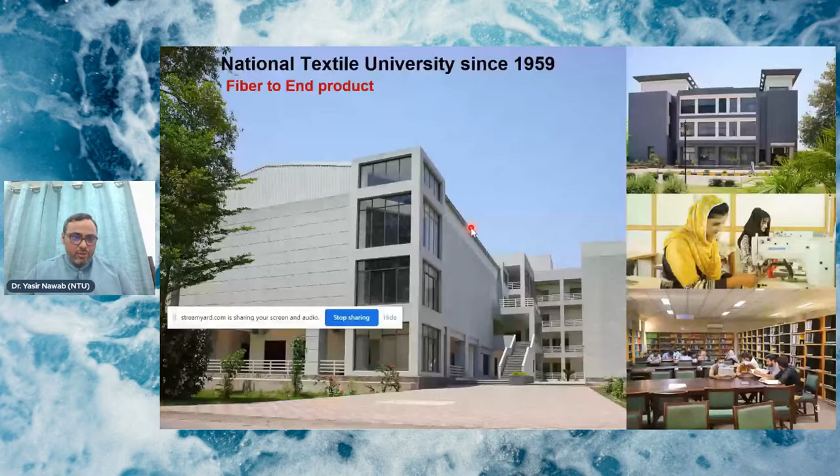National Textile University is in Faisalabad, in eastern Pakistan. We have been there since 1959, and we do research and provide bachelor's, master's, and PhD education, focusing on the complete value chain of textiles. I'm leading the National Center for Composite Materials, as well as serving as Dean of the School of Engineering and Technology.

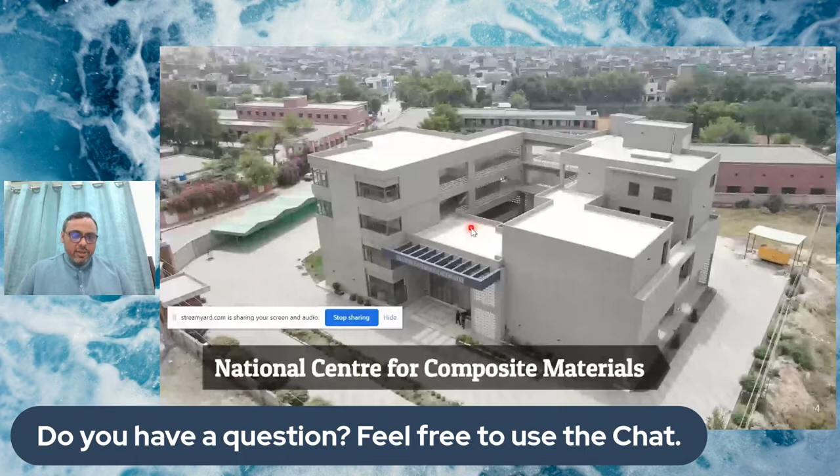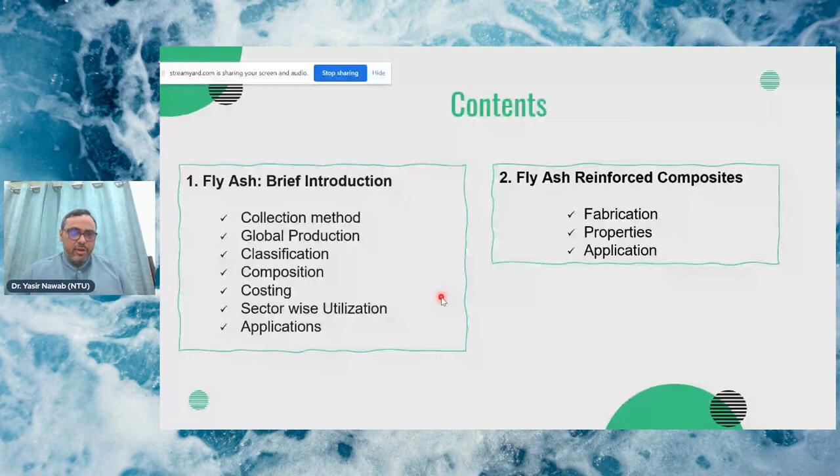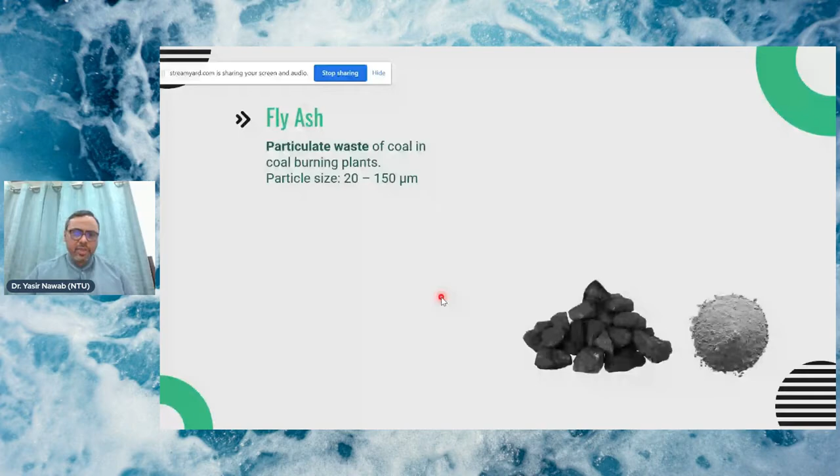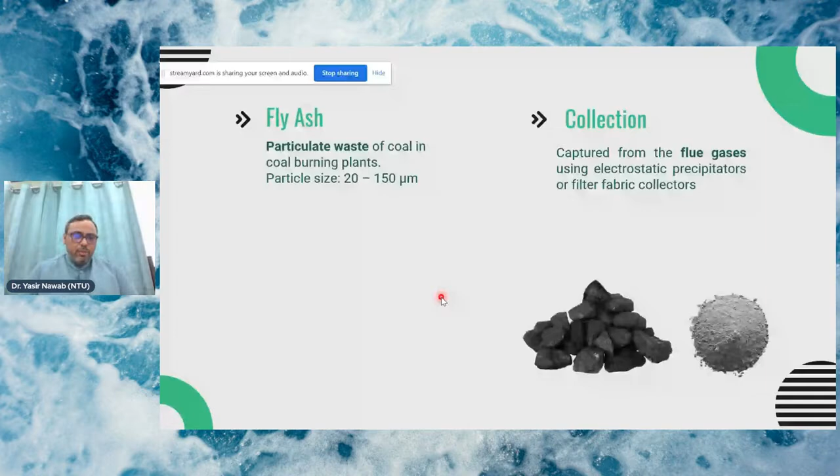Fly ash is a particulate waste from coal in coal burning plants. The particle size in fly ash is about 20 to 150 micrometers. Generally, we capture fly ash from the flue gases using electrostatic precipitators or filter fabric collectors. The composition depends upon the source and composition of coal. The major contents include silicon dioxide, aluminum oxide, calcium oxide, etc.

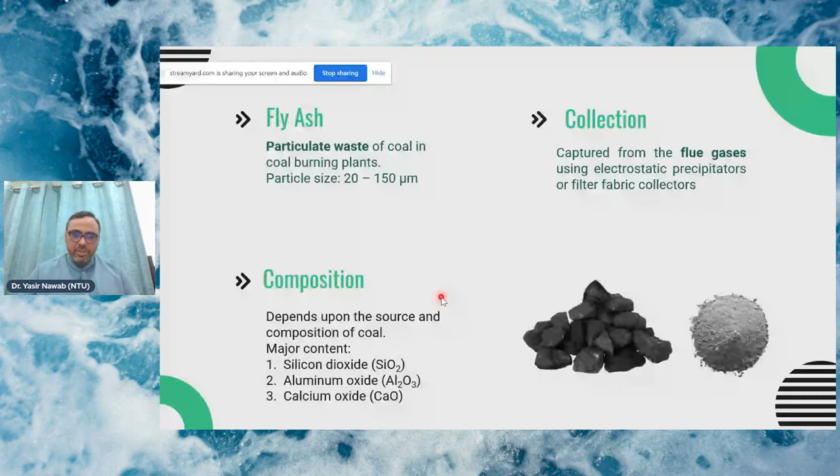Mainly, if we're talking about coal power plants, the collection of ash happens at two points. The first is the bottom ash at the point of burning, and then the fly ash, which comes from the filters. We collect it regularly, you can say after every 8 hours.

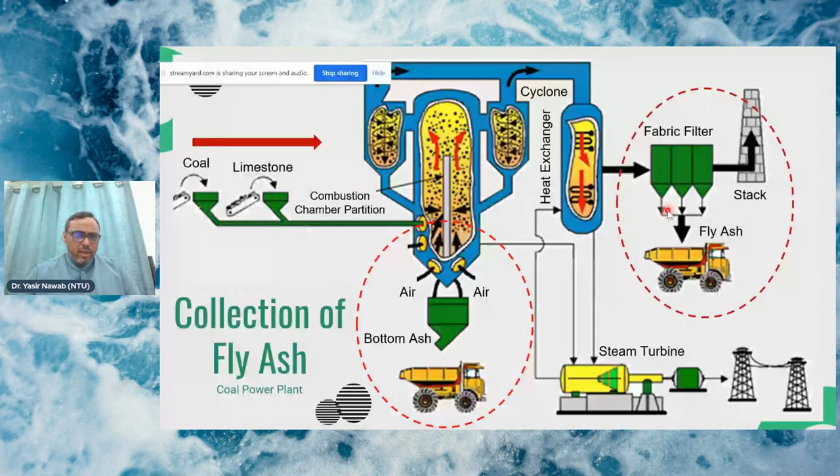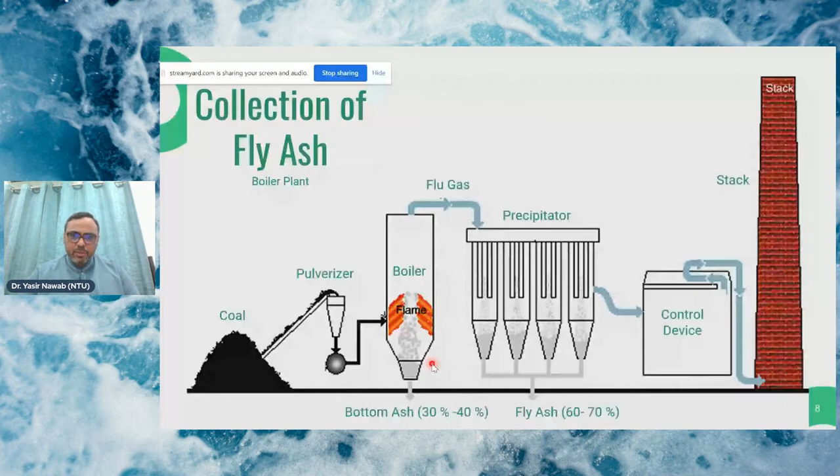In textiles, the major source is boilers. In Pakistan we have a lot of boilers, about 6,000 to 8,000, and most of them use coal or rags. The second source is brick kilns. When we use coal at the point of flame, we again get bottom ash, about 30 to 40%, and collection in the precipitators or filters is about 60 to 70%.

If we are collecting it, of course we can use it, but unfortunately in most boiler houses in Pakistan, it goes into the air, and the same is true for brick kilns. There is now regulation, and the government is trying to regulate and control this release into the air, but unfortunately most of it still goes into the air.

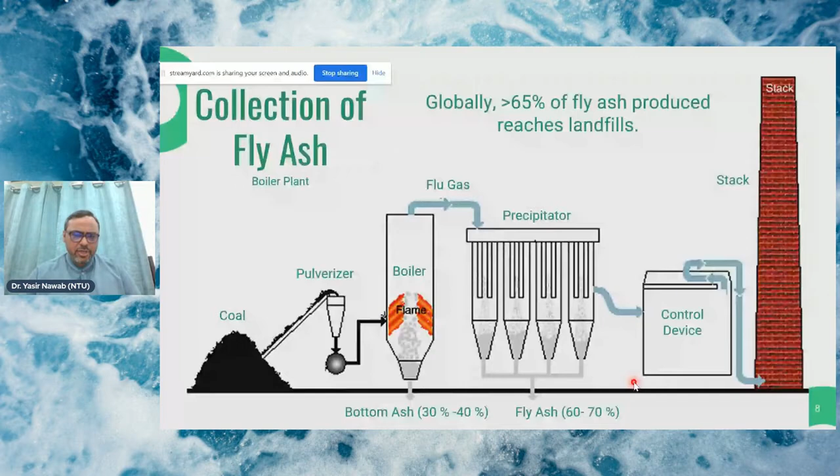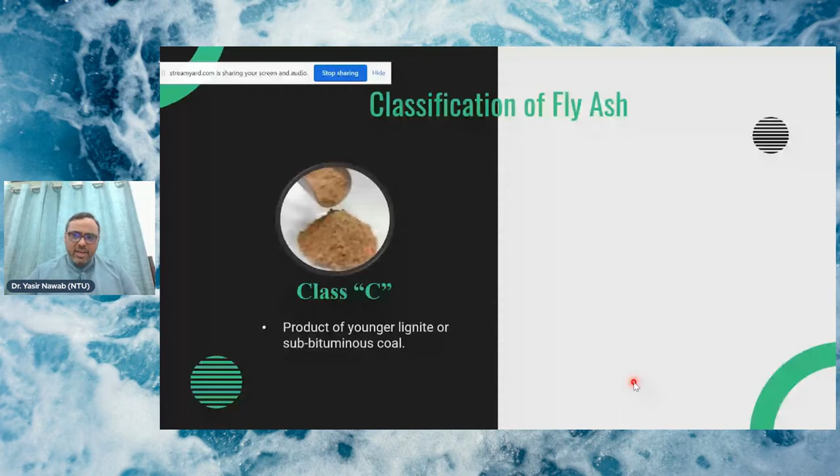If we classify fly ash, there are two classes: Class C and Class F. Class C contains more than 20% lime, so it can be used easily in civil applications as it's self-cementing. Class F mainly contains less than 7% lime, so it's not self-cementing and you have to add additives.

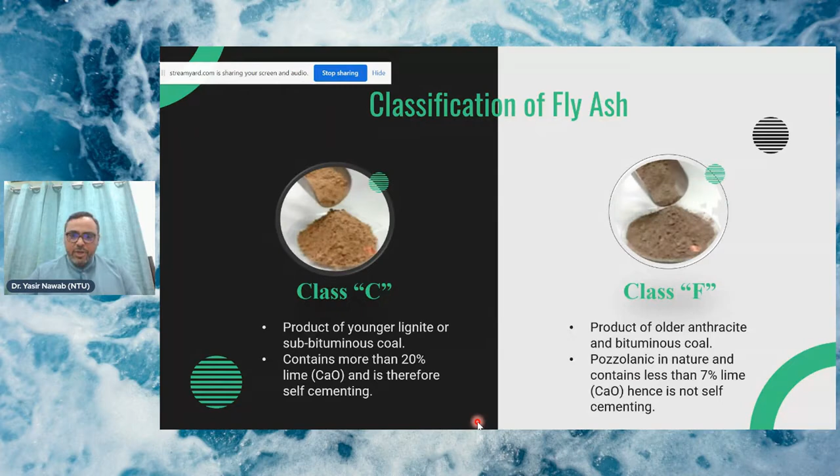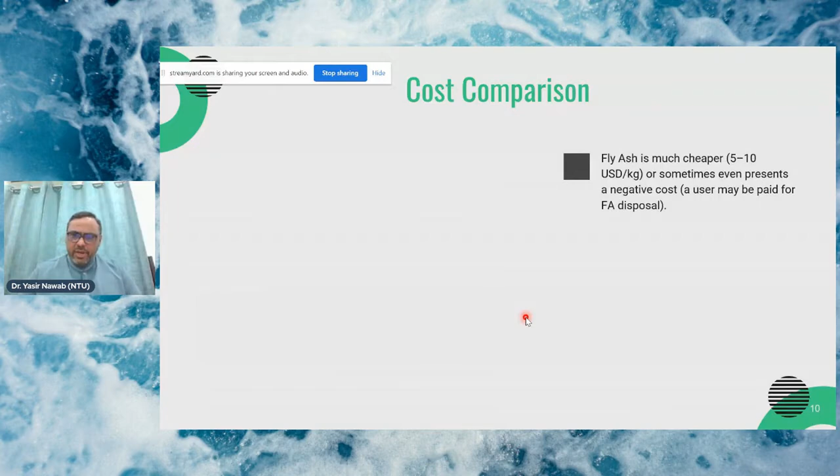Fly ash is very cheap. Its cost is about $5 to $10 per kg, or sometimes it even presents a negative cost, meaning if someone is working on disposal, you have to pay them for it. In Pakistan it's much cheaper than the rest of the world — a 50 kg bag costs about 350 rupees, or about $2 for the 50 kg bag.

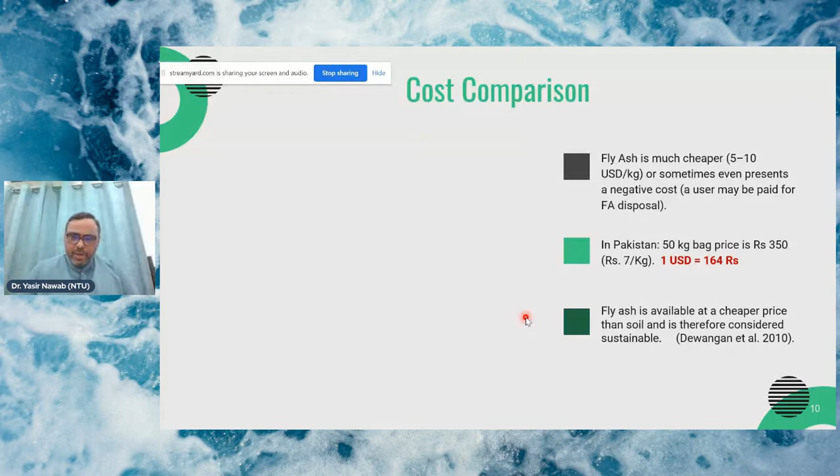Fly ash is available at a much cheaper price than soil, so mainly for land filling during construction, people are using it.

In general, in polymers and composites, we use particles as fillers. The objective is to make the material stiff, give it mechanical stiffness, and improve other properties. Generally what we use are silicon carbide, alumina, and other fillers like this. Fly ash, if we compare the cost, is much cheaper compared to others.

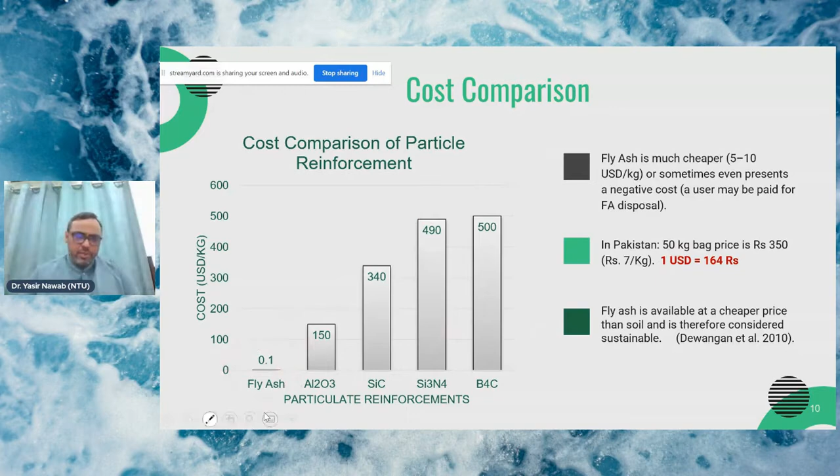Globally, for example, if we look at India, they are producing more than 200 million tons per year of fly ash, and they are only using 40% of it.

China is producing a lot of fly ash, but its utilization is about 60%. In Europe, production is lesser, and whatsoever is produced is being utilized. If we talk about Pakistan and even Bangladesh, I could not find any data, especially for Pakistan. There is no consolidated data on how much fly ash is being produced and how much is utilized.

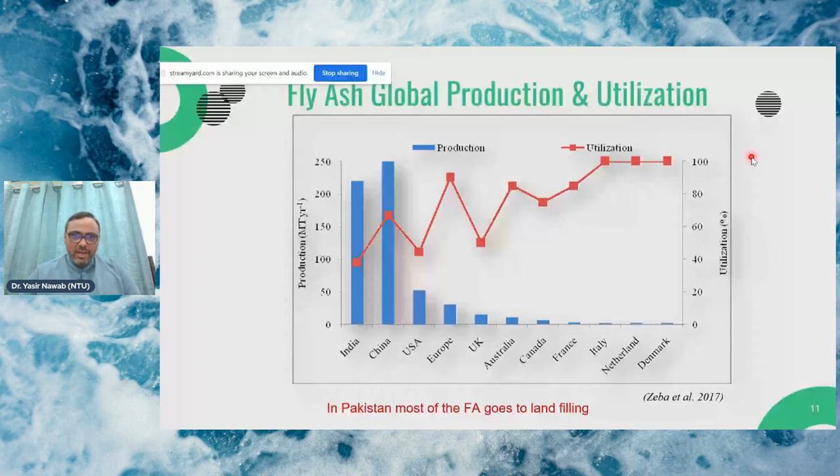The global fly ash market in 2019 was about 8.54 billion US dollars, and it's expected that by 2027 it will be about 13.33 billion US dollars. Most of the fly ash used globally, roughly 44 to 45%, is used in cements and concretes.

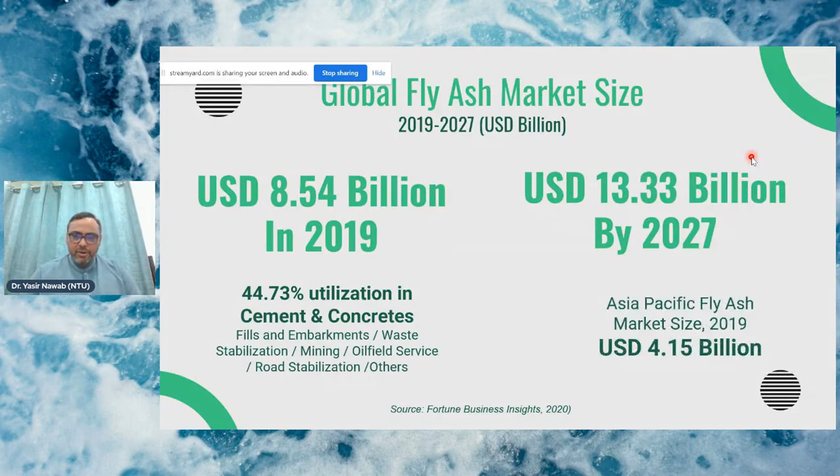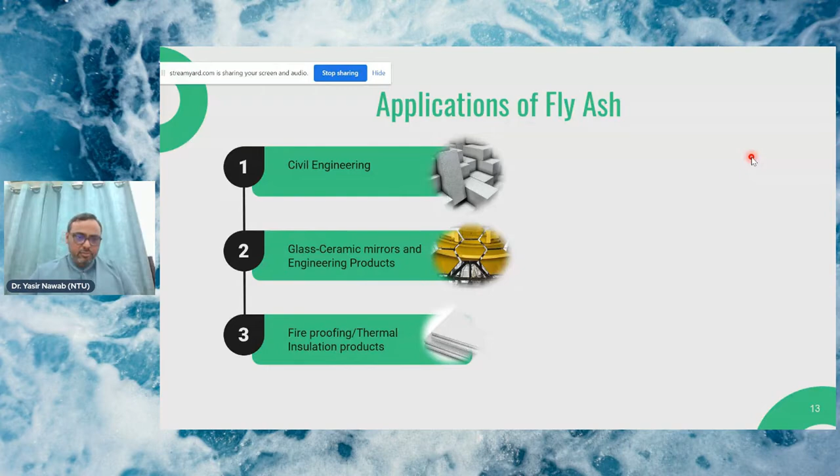If we talk about Asia Pacific, it was a $4.15 billion market, which is increasing. Fly ash has several applications: in civil engineering, which is the major application today, ceramics, thermal insulation, pollution control for filtration, gypsum boards, and aerospace and automotive industry as composite materials. These are the potential applications we are exploring at our National Center for Composite Materials, and we are confident this fly ash can replace many fillers that are being used today.

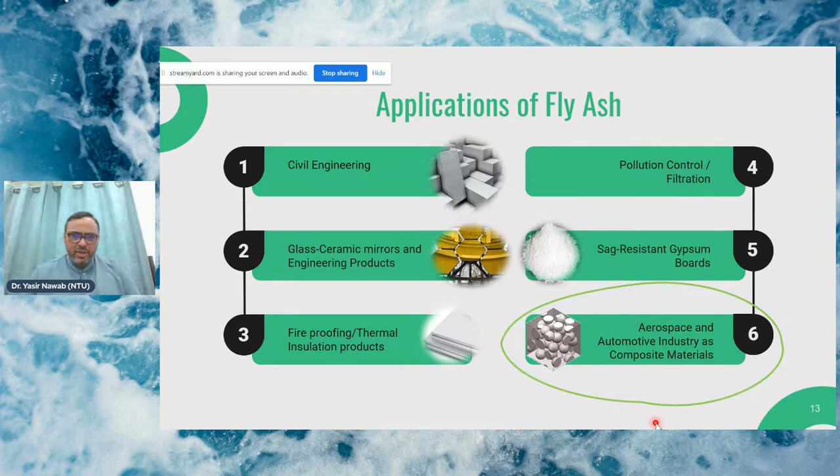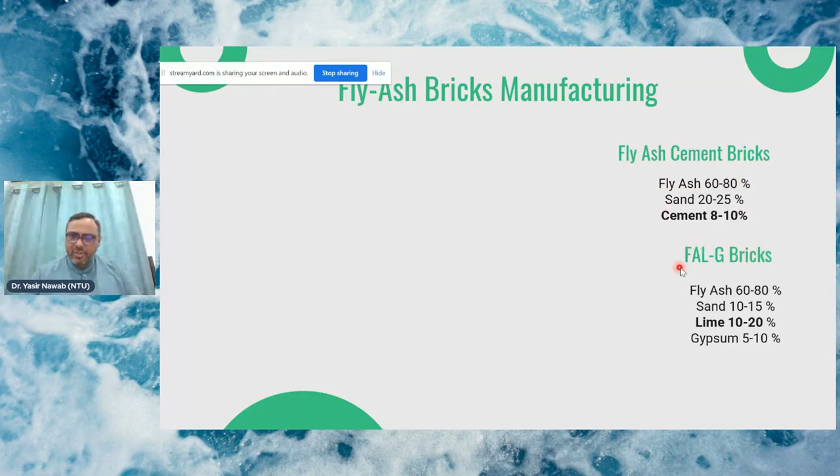One application is fly ash bricks. There are two possibilities: fly ash cement bricks, in which we use 8 to 10% cement along with fly ash and sand, and fly ash, lime and gypsum bricks, where we use 10 to 20% lime.

The process of making the plant we use is a simple plant. We need a pan mixer where we mix all the constituents, then it's conveyed to the brick mold, and after pressing, there is curing. In general, curing takes 20 to 21 days.

The cost of fly ash bricks today in Pakistan is lesser compared to clay or red bricks. It's 4 to 5 Pakistani rupees per brick, which is 2 to 3 cents, whereas the red clay brick is about 6 to 7 cents per brick.

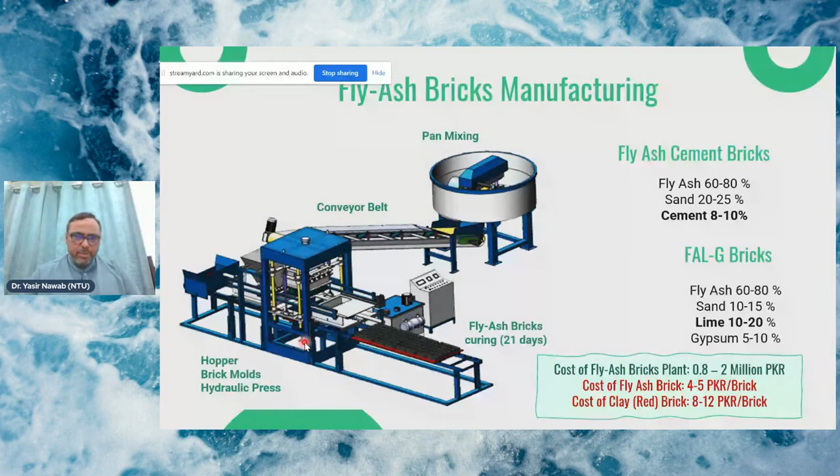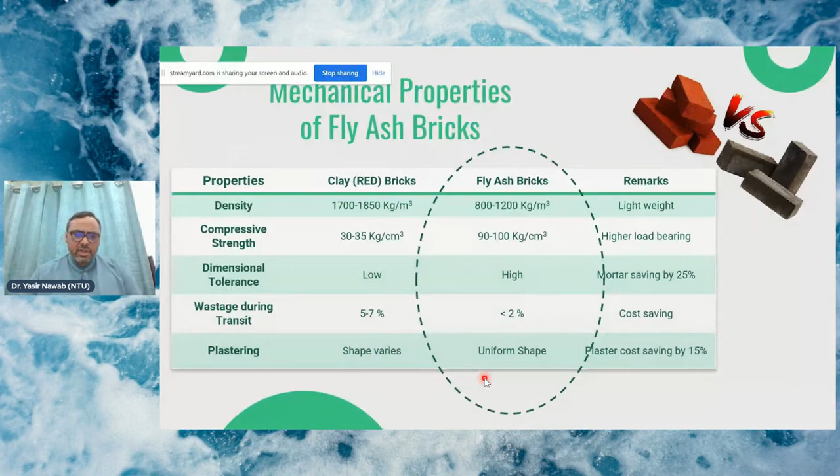If we compare mechanical properties, the density of fly ash bricks is lesser. They are lighter in weight compared to conventional red bricks used mainly in this part of the world, in Pakistan, India, and Bangladesh. Fly ash bricks are lighter, their compressive strength is good compared to conventional bricks, and their dimensional tolerance is higher. When we transport bricks, 5 to 7% break and there is wastage. The wastage in case of fly ash bricks is lower, and their shape can be maintained more easily compared to normal clay red bricks.

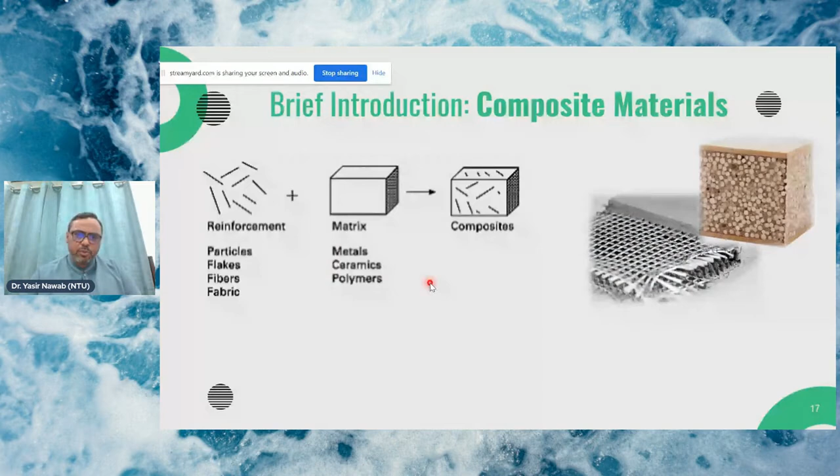Polymer reinforced composites, in general, are made using two types of reinforcement. The first is reinforcement in the form of particles, flakes, fibers, or fabrics. About 90% of composites are made with a polymer matrix, while a little percentage is made with ceramics and metals as well. Composites are preferred because you can design customized solutions with respect to properties and cost.

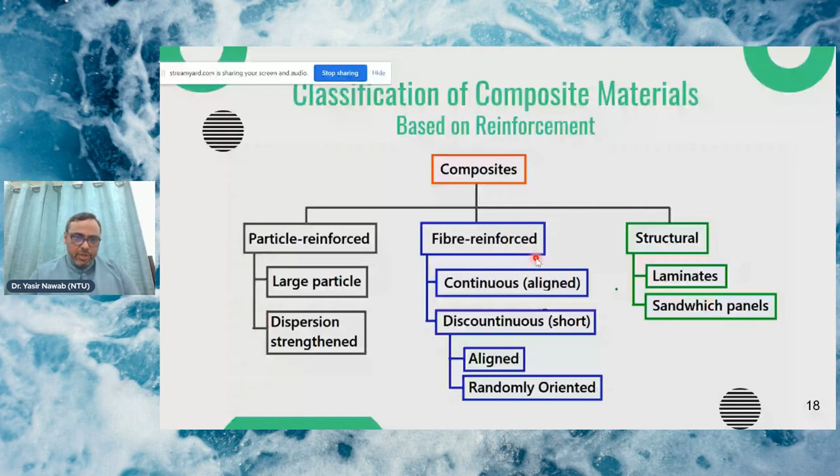Based on reinforcement, there are three types of composites: particle reinforced composites, fiber reinforced composites, and structural composites using laminates and sandwich panels. Most composites we produce are fiber reinforced polymer composites, and then we add some particulate reinforcement to adjust properties, such as giving stiffness. These days we are trying to hybridize both types of composite, fiber reinforced composites with particle, nano, or micro reinforcement, to get the desired properties.

Based on matrix, there are three types: polymer matrix composites, metal matrix composites, and ceramic matrix composites. Polymer matrix composites account for about 90% of the volume of composites. Metal matrix and ceramic matrix composites are mainly for high thermal ranges and applications where friction and abrasion are high. In daily life, the mostly used composites are polymer matrix composites.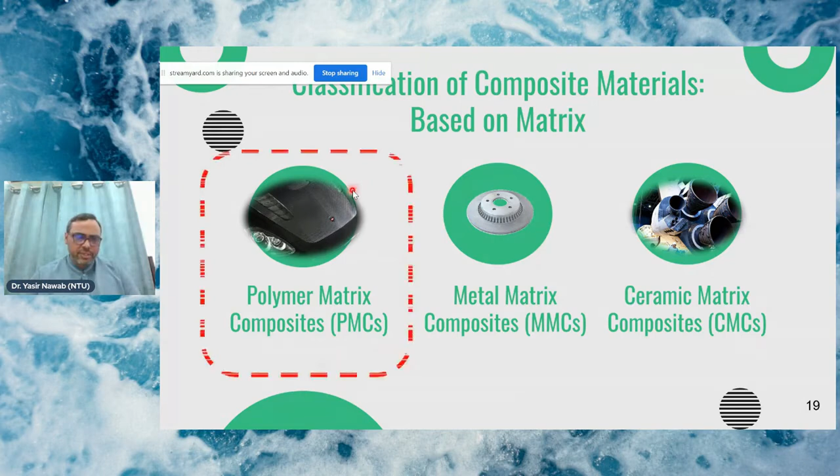So I will be sharing two examples of polymer matrix composites made using fly ash. Before that, I will be sharing about the process of making composites with fly ash.

For example, we will be in need of fly ash particles and a matrix, which can be any polymeric resin. The most challenging point in making these composites is the uniform mixing of fly ash particles into the matrix. So for that, we use stirrers like magnetic stirrers and high speed mechanical stirrers, and sometimes we use a sonication bath as well in order to assure uniform dispersion.

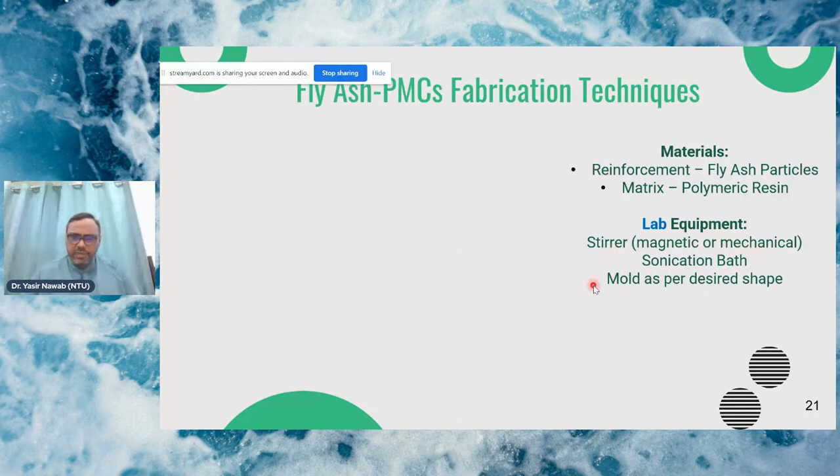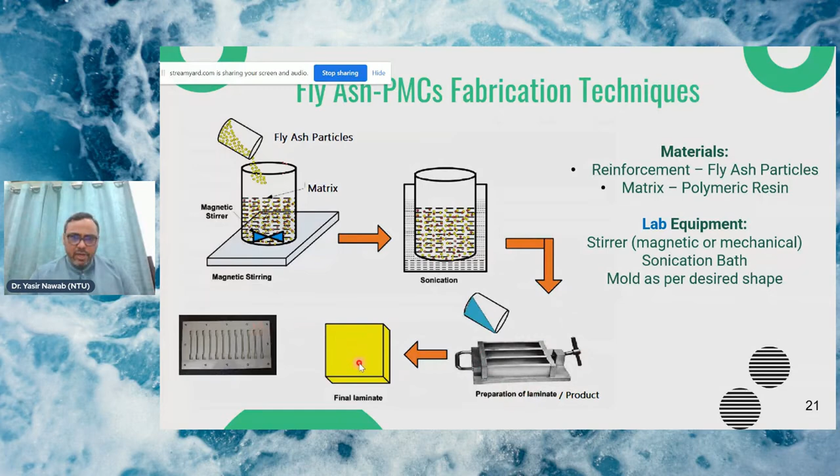In order to make composite, we are in need of a mold as per desired shape. So we mix it, we do sonication, then we pour the mixture in the mold in order to get the final shape. Then we make a composite, and if we are working in a lab, we cut it in order to test it as well.

So the first example I'm going to share with you is high density polyethylene polymer mixed with fly ash. It's a thermoplastic polymer. The fly ash was taken and mixed in acetone so that dispersion can be made, and there was a coating of fly ash on the particles of high density polyethylene.

Then these particles coated with fly ash were fed into the hopper of a twin screw extruder, and we get the films which were ultimately converted into the composites. Using this method, the dispersion was very good.

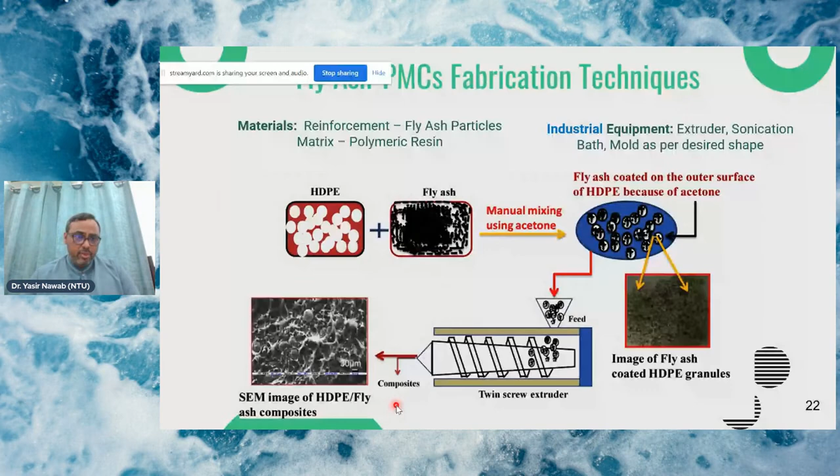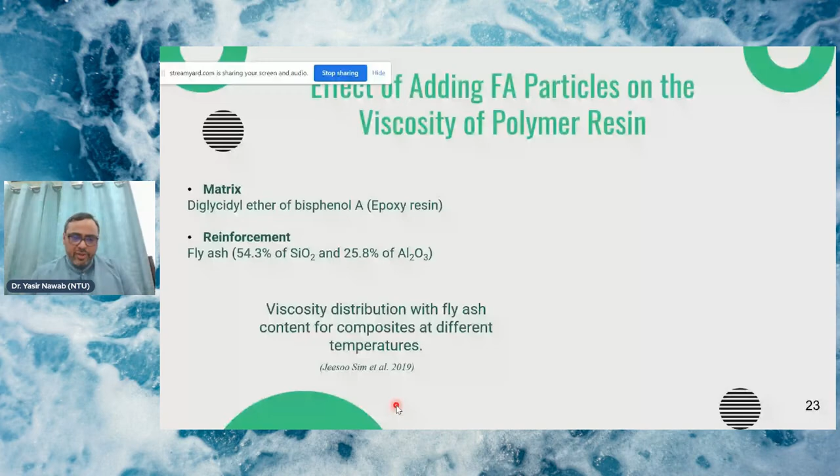There is another example with epoxy, a thermosetting resin, where fly ash was used along with it at various percentages. When we are working with a thermosetting matrix, another problem is that when we add fly ash into the matrix, the viscosity of the matrix increases. For example, if we increase the volume percentage of fly ash that we are using in the matrix, there is an increase in viscosity.

This increase in viscosity can be controlled for a specific time by increasing the temperature. This was done for three temperatures: 20 degree, 40 degree, and 60 degree centigrade. At 60 degree centigrade, the effect on viscosity is limited for about 1 hour. This is a sufficient window in which we can do our manufacturing.

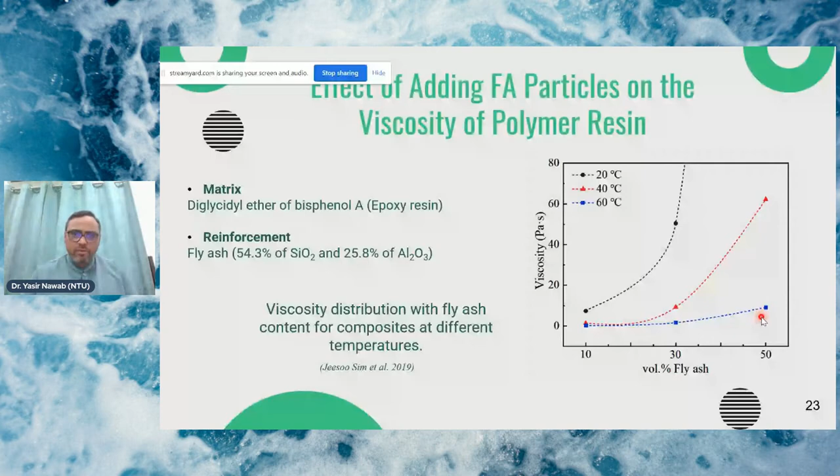Another problem is the density of polymer, which ranges between 0.9 to 1.2 gram per centimeter cube. The density of fly ash is lesser, they are very light particles. When we try to mix them, there is a problem of wettability, and in general for composites, aggregation of particles as well.

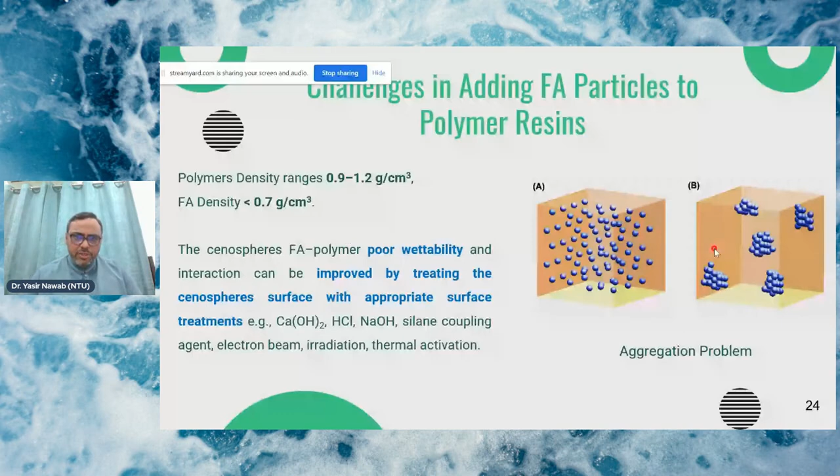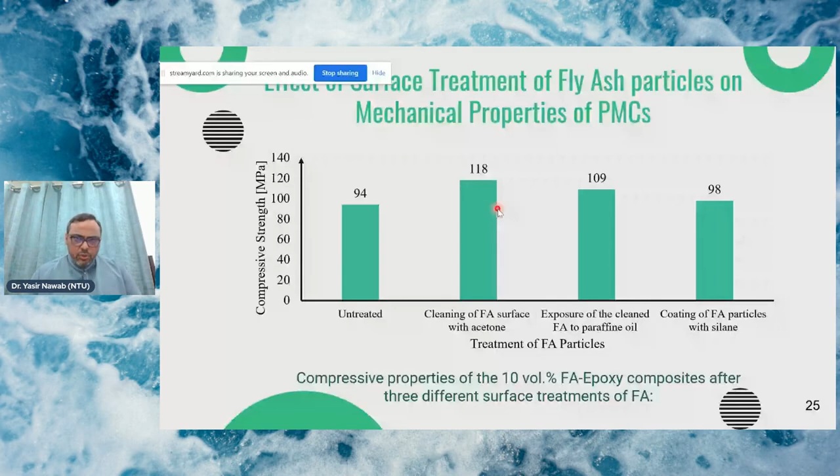So it means by proper dispersion, by proper cleaning of fly ash, we can add these particles to the composites, whether they are thermosets or thermoplastics.

So when we add fly ash particles to the polymer, the tensile stress and strain curve shows that the modulus increases. There is no significant increase in tensile strength. The compressive strength increases, the bending stiffness increases, the impact strength increases, but the impact on tensile properties is not very significant. However, in terms of modulus, it increases significantly when we add particles.

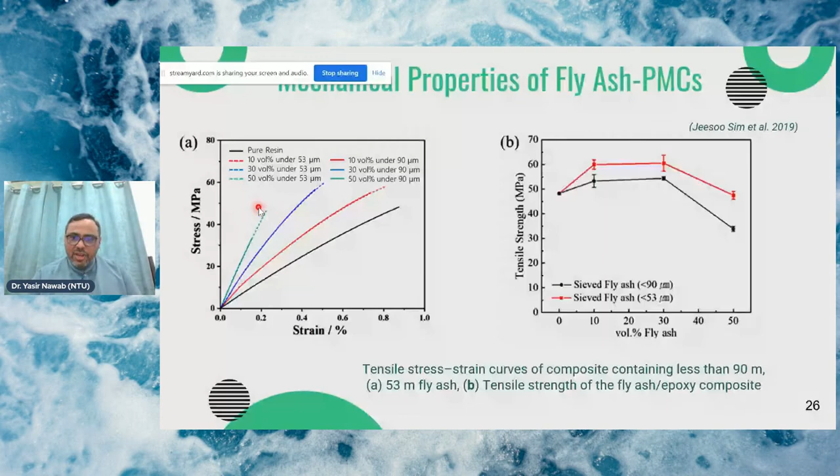However, if we change the particle size, of course for that we will need further classification. But if we use particles with lesser size, due to their higher surface area, the tensile strength increases as well for different percentages of fly ash.

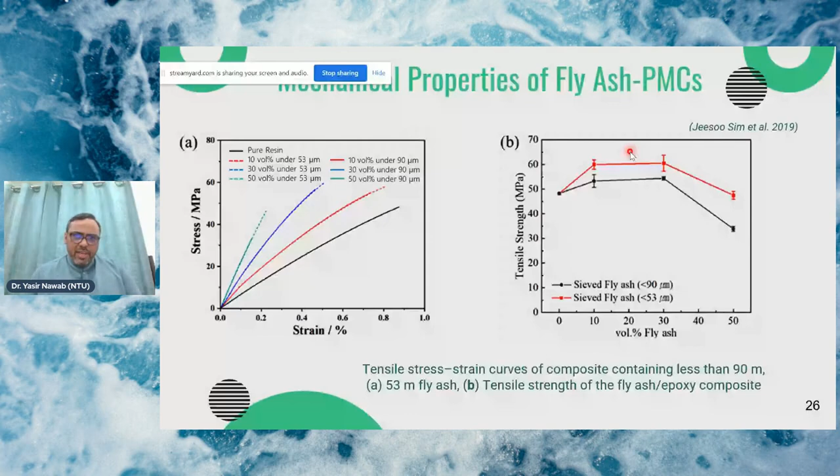So the applications of fly ash composites, the potential applications can be in automotive body parts, aerospace and aircraft structural parts, defense applications, fireproofing of civil structures, thermal insulations, packaging, sports equipment, etc.

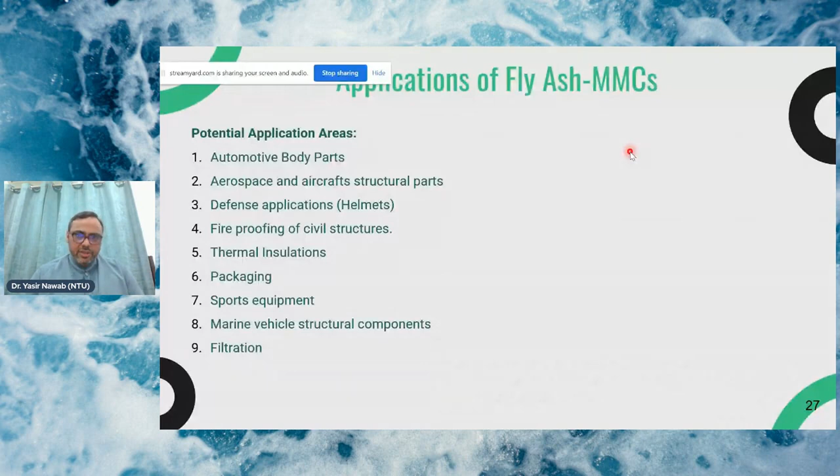I have not shared the examples with fiber reinforced composites. I only discussed the addition of these fly ash particles to the polymers.

So the conclusion: fly ash is an environmental hazard which needs to first be collected, and then the next step will be to convert it into some eco-friendly products. This waste can be easily recycled into various valuable products. What we are working on is to convert these fly ash particles to use them into composites in various ranges, like for low tech, medium tech, and even high tech composite parts.

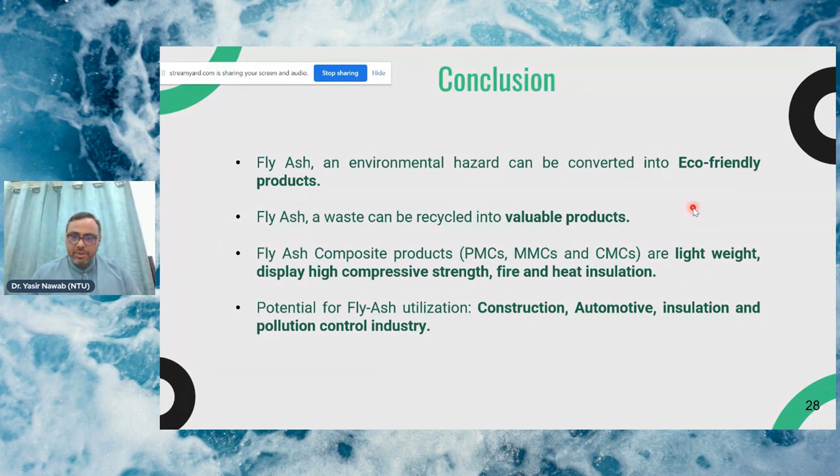So these are lightweight, they are cheaper, they are fire and heat resistant, and these composites made from fly ash particles have potential to being used in construction, automotive, insulation, and pollution control industry. Thank you very much.